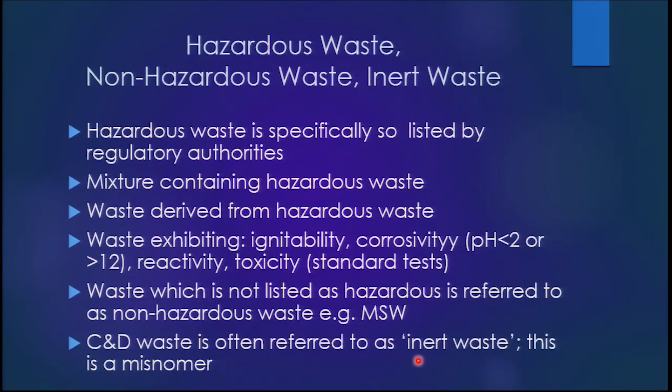Construction and demolition waste is often referred to as inert waste. Now, inert waste, in its purest definition, should not be chemically active, should not be biologically active, and should not be physically active. Those are the three things you need to have to become an inert waste. Again, I say, not chemically active, not biologically active, and not physically active.

Now, construction and demolition waste is all that we are breaking down, right? And if we are breaking down a building, then it's concrete, it's brick, but it is also wires, it's also the paint, it's all the rebars, the reinforcement bars. So untreated C&D waste or unprocessed construction and demolition waste is definitely not inert, right?

Then the next step is you can process the waste. You can do magnetic separation to remove the metals. You can do other kinds of separations to remove some of the other constituents. Then you get what is called processed construction and demolition waste. It's difficult to remove paint from it, and paint itself has some properties which are bothersome. So still it is not inert waste.

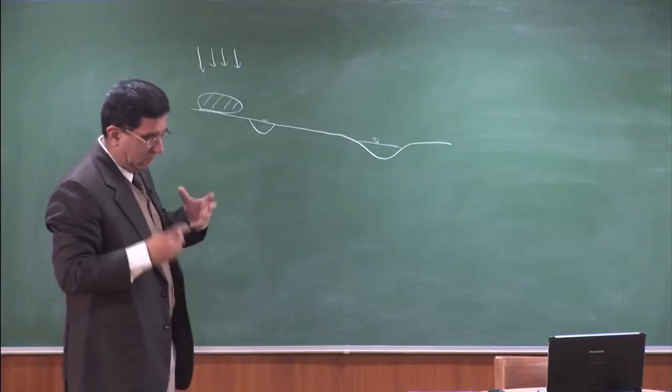So if the waste was not there, where is the rainwater going? It's becoming surface runoff, and partly it is recharging the groundwater. So when rain falls on the ground, does the bulk of it recharge the groundwater, or is the bulk of it surface runoff? A bulk of the rain doesn't go into the ground, because the ground normally has grass or a natural slope. So infiltration is low. Most of it is surface runoff. It goes to a local drain, the drain goes to a river, the river goes to the ocean. And therefore, the water goes like this, and maybe some of it goes like this.

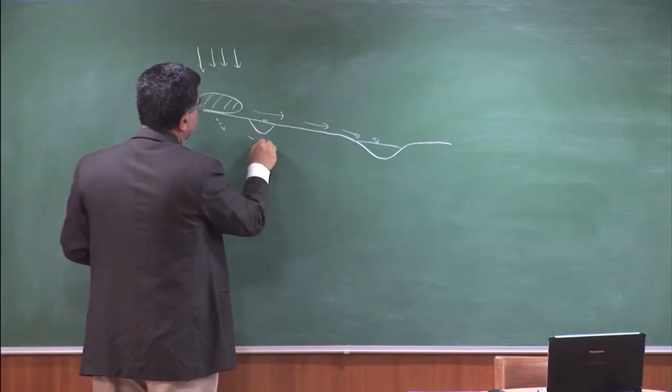And what happens? This goes to the ocean. Then what happens? It evaporates. It becomes clouds. It comes back and rains again. So really, the hydrological cycle is

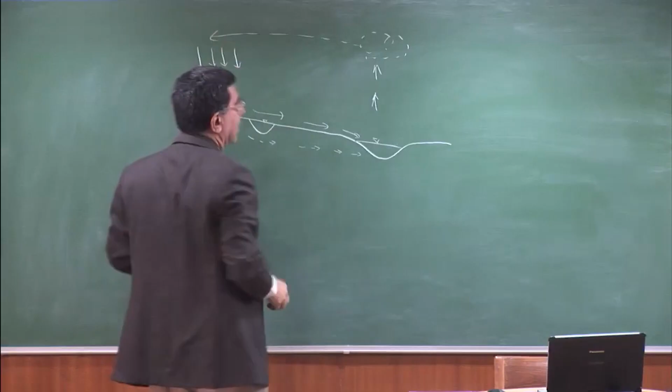so every now and then we have monsoons. Where are the monsoons coming from? The moisture-laden clouds. Where is the moisture coming from? Some place where the water evaporated, and when that cloud comes to a cold region, it falls as rainfall. So this cycle is going on every year, and our waste has knowingly or unknowingly become a part of this cycle. It chalta rahega.

Right? So we are looking at waste-soil interaction. And the first important thing to realize is when we place something in the open, we are making it a part of the hydrological cycle. If I had placed the waste in a shed which had a proper roof and walls and was closed all around, then what would happen? Then the waste would not become a part of the hydrological cycle, because the rain would fall on the roof, would put the rainwater aside, and we would prevent this waste from becoming a part of the hydrological cycle.

But till the time that happens, we are looking at this phenomenon. We are looking at the phenomenon of some waste being on the ground, rain falling on it, rain percolating through it, and going into the groundwater. So I've used some terminologies which you might be aware of: vadose zone, saturated zone, capillary rise, but we'll take a quick recap on this.

What we want to know is, in waste-soil interaction, what is happening when the water passes through the waste? And what is happening when it passes through the vadose zone? And what is happening when it is into the saturated zone? That's what we want to really know. So just let's quickly go back to those definitions. Saturated soil is all voids filled with water. Below the groundwater table is saturated soil.

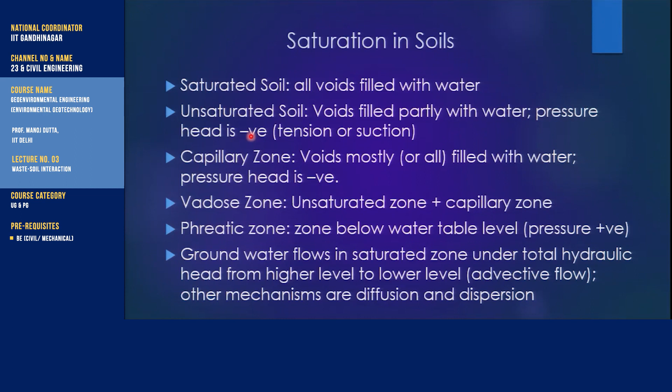Above the groundwater table, saturated or unsaturated? Partially saturated or unsaturated, but unsaturated soil, voids filled partly with water. And the pressure head inside is negative because of surface tension effects, so you have a suction or a negative pressure in the partially saturated soil. But there is a capillary zone above the groundwater. Is that saturated?

Yeah, the capillary zone is saturated, but the pressure inside the capillary zone is negative because the capillary action is making the capillary rise. So the vadose zone, the word vadose zone which we have used, it covers both the unsaturated soil and the capillary rise and the capillary zone. Truly, the saturated zone is below the water table. So phreatic zone is the zone beneath the water table.

Now we start to get positive pore water pressure, and groundwater flows in the saturated zone under total hydraulic head from higher level to lower level. This is called advective flow. We've all done this. The Darcy's law is valid. Q is equal to KIA. That is the mechanism by which the water is flowing in the saturated zone. We have not done how the water flows in the unsaturated zone. I will briefly visit that here.

The other mechanisms, once the groundwater is contaminated with something, that means the concentration of a particular constituent in the leachate is higher than in the groundwater. So there's a concentration gradient. So over and above the advective flow, you have the other mechanisms which are diffusion and dispersion. We'll discuss them very briefly later.

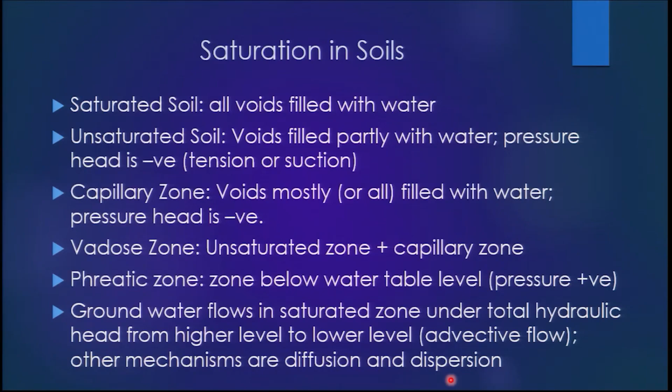This is not a course on groundwater contaminant transport. These are processes. There are huge softwares which can simulate diffusion and dispersion. Ours is a course on design of waste containment facilities, design of slurry ponds, and remediating contaminated sites. So let's look at the process.

The rainwater falls on the waste, some runs off, some infiltrates. So how much will run off and how much will infiltrate will depend on how the waste has been placed. If the waste is properly compacted, it has a convex upward shape, it has got a layer of soil on it, then most of the water which will fall will run off on the convex shape.

However, if it is a waste dump which nobody is managing and the surface is like that, undulating surface, then the water tends to stick on that undulating surface. It will form small puddles, and that water tends to go down more. So rainwater falls on the waste, some runs off, some infiltrates.

This infiltrating water, will it reach the ground? My question is, some water enters the waste. Will it reach the ground? So let me go back to the slide and let's try and simulate this on the board.

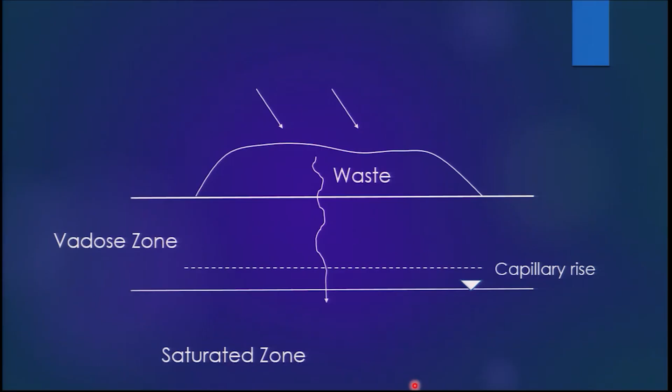As I said, some will run off and some will infiltrate. So if 10 units of rain fell, and let us say 7 units ran off, that means a good convex shaped thing, then 3 units went in. And now will the 3 units reach the ground surface? That's the first question.

Pardon? No, there's no lining. This is just a waste dump which seems to have a convex shape. If it doesn't have a convex shape, 3 will run off, 7 will come in. Right? The question I'm asking is, if 7 units were here, will there be 7 units here? Because where will they vanish?

Decomposition of what? Of H2O? Chemical reaction inside. Well, let it chemically react. So what? Some material will go into solution and still come down. So first, let's assume that the waste is not reactive. Then will all the water which fell on top come down? Maybe it will fill up the void, some part of it. So it will fill up the void, then it will come down.

So what you're trying to articulate is that if the waste is inert and X units went in, some may be held by the pore space. I'm not sure whether it will be held or not. But if you have fine pores, then by capillary action alone you will hold water. Only excess water will come down. So if X units come in here, something less or more than X can come. How will it be more? Maybe the waste itself is also squeezing out liquid.

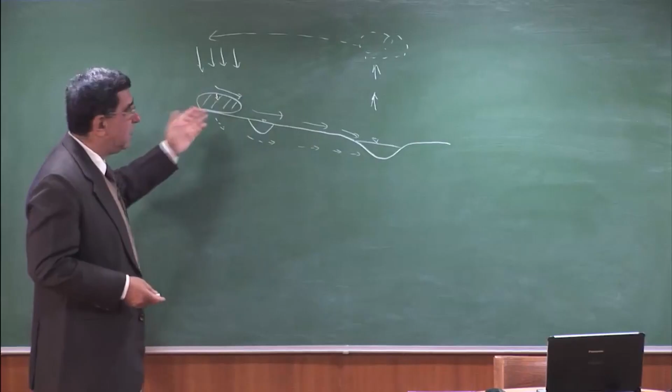But if leachate is going to be held in the pores, you may have less water reaching the base than the water which was coming in from the top. Then what happens? Now our leachate encounters the soil. Now in the soil also there is a distinctly saturated zone and the unsaturated zone. So when the leachate goes into the soil, what will happen?

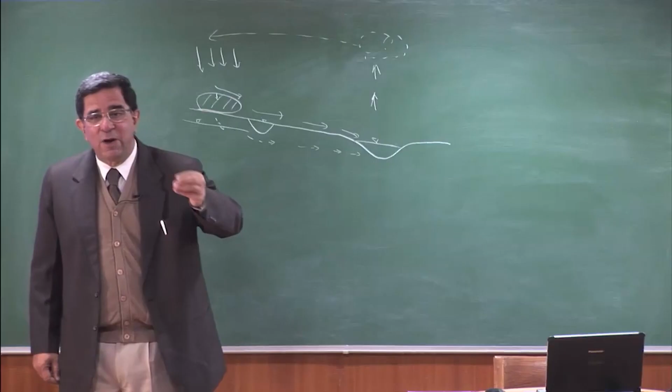Again some of it will be held, because in the unsaturated zone, maybe there is dry soil, so you add 1-2% of water, it is not going to flow, it is going to be held because there is a field capacity of the soil. Then the excess water will come down. The other thing is, will there be a chemical reaction now between the soil and the leachate which is coming in? What do you think?

Maybe? Yeah. So intense interaction between the water and the waste, and it can be two-way. It may be dissolving something and going down and precipitating it at a lower level. We can't predict the complexities of this, but we can model them. Then you hit the soil, and is soil inert? Why not? Is sand inert? Well, let's not talk about physically inert, but is it chemically and biologically inert?

Soil? Sand? So you said soil may not be inert, but sand may be inert. Is that a correct statement? Why will soil not be inert? It's a mixture of? What is typical organic content of soil? So what was said was soil is not inert because it is a mixture of organic and inorganic.

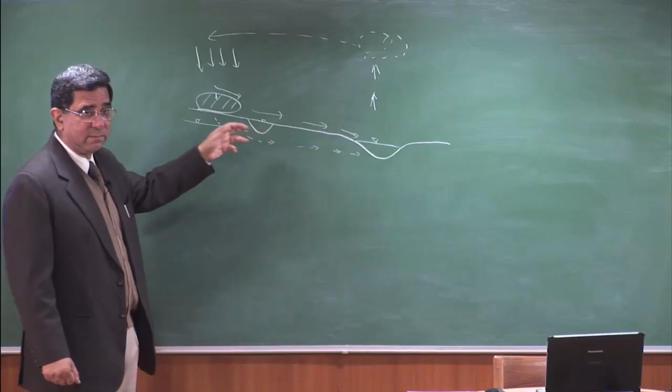And the balance leachate, which is over and above the holding capacity of the soil, goes into the groundwater. And that interaction continues because there is a soil matrix in the groundwater also. But now the groundwater is moving. In this moisture, nothing is moving. But when you come to the groundwater, it is moving under a hydraulic head from higher ground to lower ground. So consequently, the contaminant begins to move in the groundwater. So that is the process. At every stage there is interaction and all kinds of interaction. So for a civil engineer, it is mind-boggling, but it's not very simple.

It's too complex. So what is the worst design condition? Worst design condition is leachate is coming out of the waste, going into the soil, the soil is becoming saturated, and then it is getting a saturated connection with the groundwater. That's the worst condition, because is the permeability of partially saturated or unsaturated soil more than that of saturated soil or less? Why less? The void space is the same.

Yeah, so one is the issue of matric suction, and second, water will only travel through the water film. So if you have a void space in which 50% of it is water, then water will only travel through that water film, and therefore the cross-sectional area of the pathway is smaller. So partially saturated soil will have low permeability to water. As saturation increases, permeability to water will increase, and when it is saturated, it will be the highest value. So the critical design condition is everything is saturated.

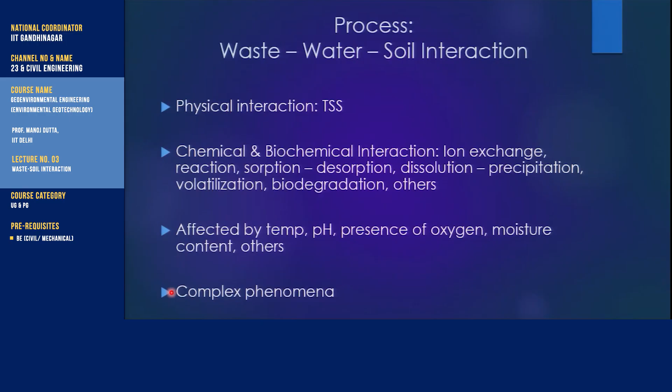So what kind of interaction occurs? There is physical interaction. As the rainwater goes down in a waste dump, total suspended solids may go down. The fines may travel with the water as it goes down. So there is a tendency, if you have heterogeneous municipal solid waste, the fines tend to come down with time, because as the water goes through, the fines come down with it.

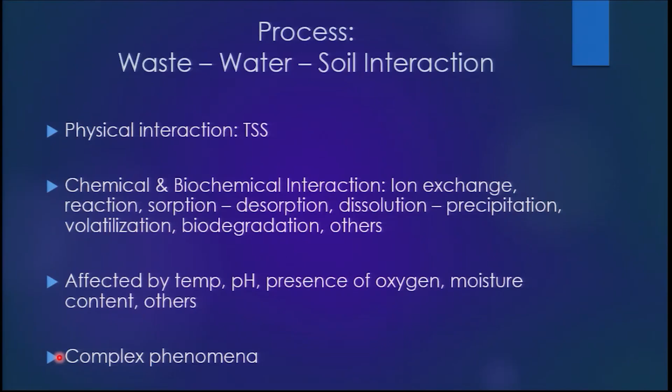And there are a lot of chemical and biological interactions: ion exchange, reaction, sorption, desorption, dissolution, precipitation, volatilization, biodegradation, and others. I can't predict which is the predominant reaction which is going to take place. And these are affected by the temperature, the pH, the presence or lack of oxygen, the moisture content in situ, and other factors. So this whole thing is like a biochemical factory which is going on. Waste first interacts with the water, then interacts with the soil, and then it reaches the groundwater.

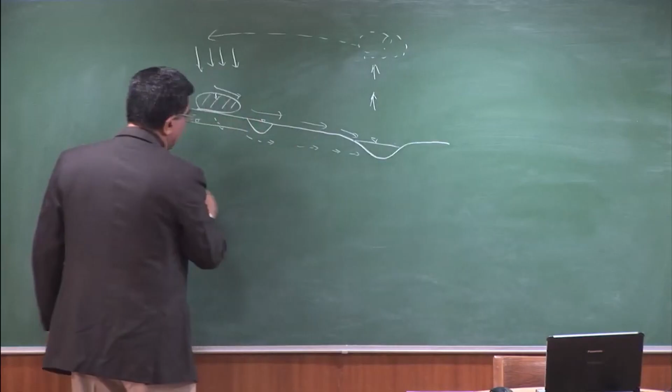Again, one may tend to think, let us say I have soil. Okay, let's go to original ground. And 100 units of rain are falling on this original ground. And let us say out of these 100 units, 50 to 60 units are running off, surface runoff. Then what is going down? 40 to 50.

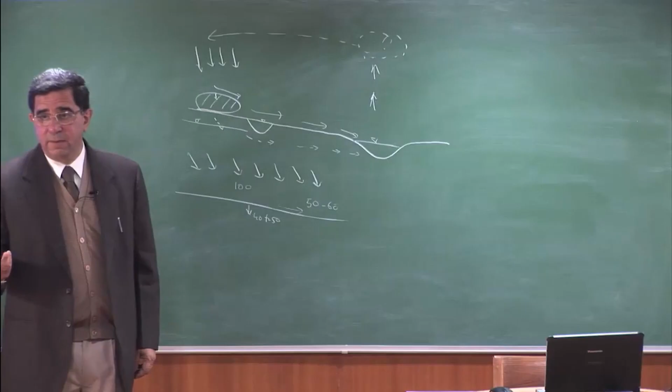Now some of it will be held, right? Because the soil on the ground surface is dry. The water table is somewhere deep below, or few meters below. So out of this 40 to 50, due to evapotranspiration, 20 to 30 may go up. So what is going down? Maybe even 10. Now these are all hypothetical figures.

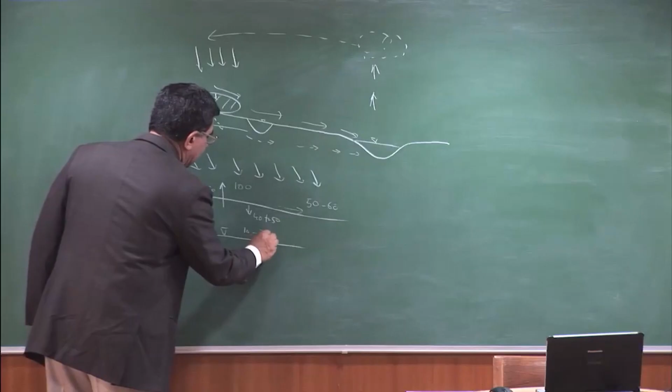But if you look at India as a whole and take the major river basins, the following is what is observed. About 50 to 60% of all the rain becomes stream flow. Groundwater recharge is only 10% or less. So groundwater recharge from directly precipitating rain is not very high. And the balance is evaporation and evapotranspiration. First, what accumulates on the surface is evaporated, and then the plant roots also take it out. So very little amount reaches.

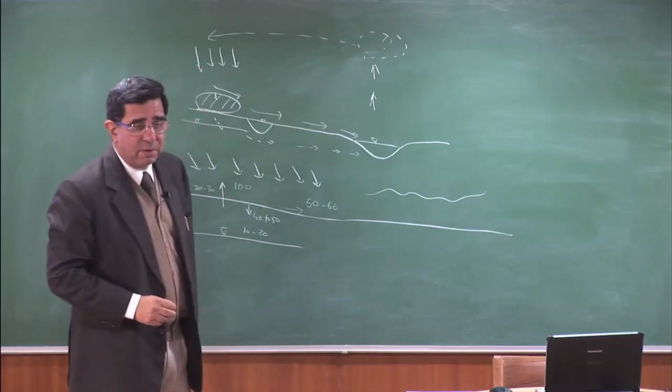But if I now put a badly maintained waste dump in position, what is happening? The 50 to 60 runoff falls to 10 to 20 or 20 to 30, right? 80 goes in. Now in a waste dump there is no grass or vegetation growing. It's a municipal solid waste dump, or a hazardous waste dump. So is there transpiration? No. Is there evaporation? Yes. If some of the water holds on the top, it will evaporate back. So maybe 10 will go back. 70 is still going through.

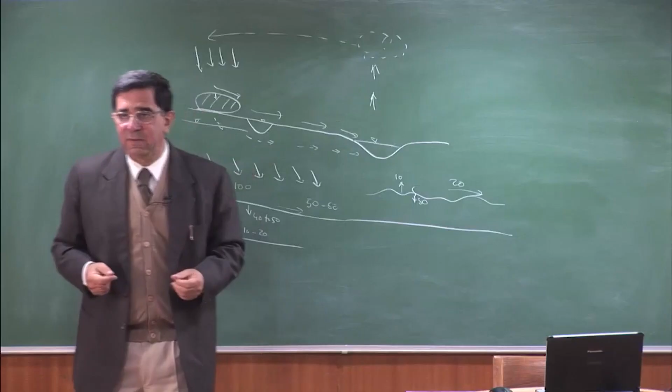Now the model comes into play. Out of the 70, maybe 30 should be held by the waste. Maybe. But what if the waste has vertical preferential flow channels? If you go to a waste dump, you'll sometimes see vertical cracks. Through those, it will go very fast. So this concept of a homogeneous soil mass doesn't exist for waste. Waste is a heterogeneous mass. If it went uniformly everywhere, maybe 30 to 40 would be held back. But it doesn't; you may have vertical paths, horizontal paths, any kind of high permeability zones.

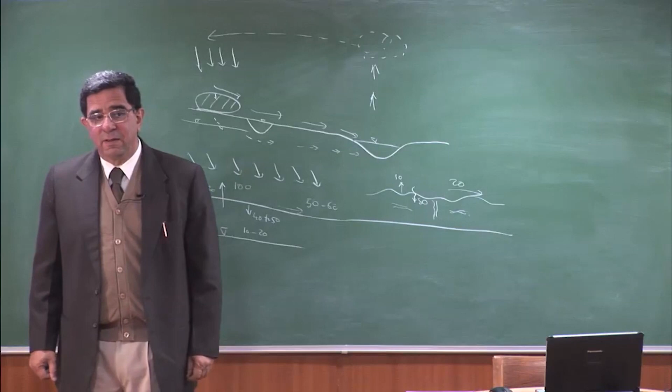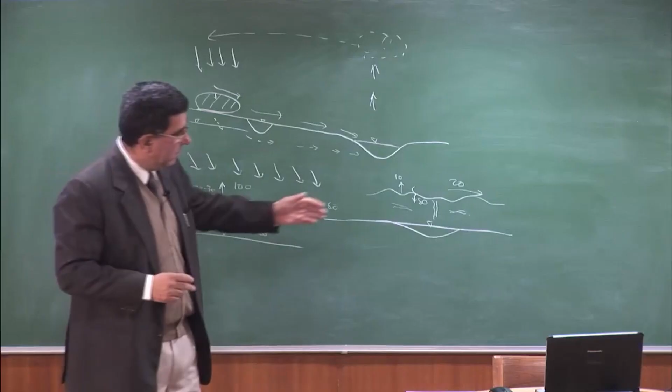And then it comes and sits at the ground surface, and the ground surface is horizontal. Waste is typically placed where? In horizontal ground or low-lying areas? I told you, most of the time waste is put to start with in a low-lying area. So all of it will come and accumulate in that low-lying area, and the fines have come down anyways. And will this go back up? No. There's no evaporation possible, it's all covered. So a larger amount of leachate tends to come down.

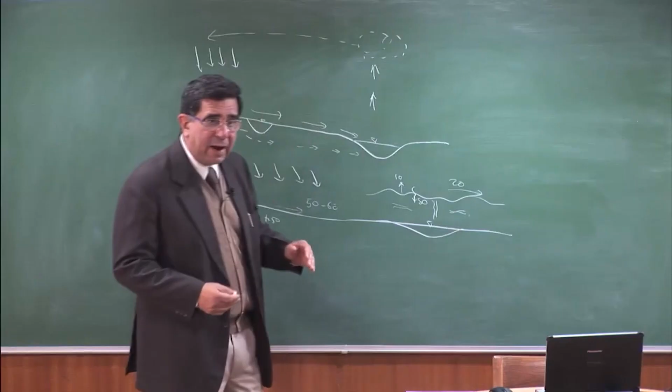However, if you do leachate calculations using the holding capacity of soil or an equivalent soil mass, you tend to show a lot of water is held in the waste, which may or may not be held, depending on the vertical preferential flow paths. And if you go to a waste dump, you'll find perched water tables. Why? Fines came down and settled at one level, and at another level. So there may be high permeability zones and impervious zones as well. When excavating, though there is no water table, you find little puddles of water inside the waste because of the fines. They don't reach the base. When you have a 30-meter high dump, fines will come down.

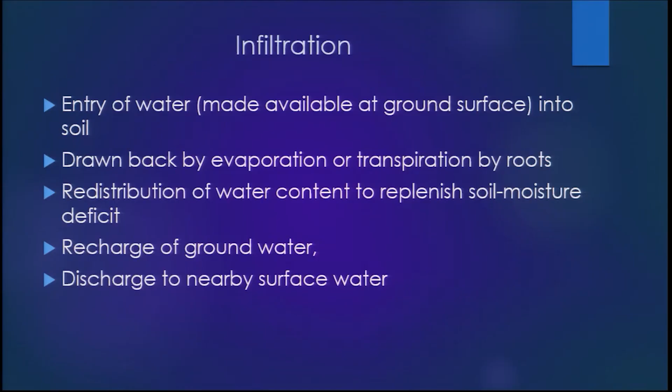Anyways, infiltration capacity is the maximum infiltration rate. Field capacity, as I told you, moisture content of unsaturated soil above which rapid downward movement of water takes place, and soil moisture deficit, moisture content below field capacity. A soil with deficit holds infiltrating water.

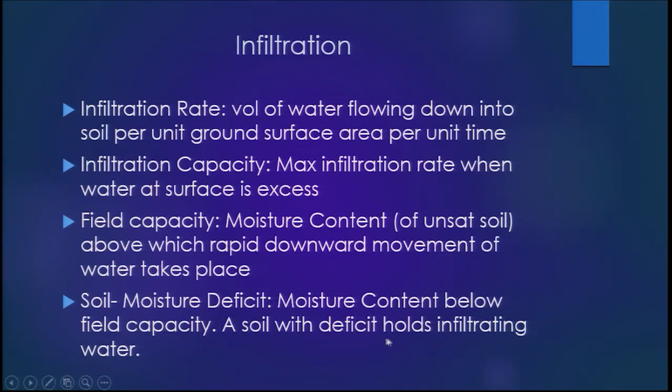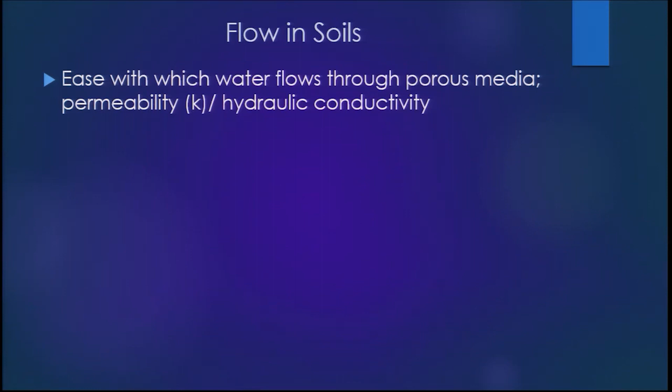We all know about flow in soils, Darcy's law, advective flow, but let's recapitulate. The ease with which water flows through the porous media is reflected by the term permeability. You will also find the term hydraulic conductivity written in many books. So flow in saturated media is through difference in total head. Flow in unsaturated soil will not occur unless suction greater than the tension is applied. If the water is in tension, you have to have a head greater than that.

So typically in dry soils, the tension is the main dominating factor. As saturation increases, tension decreases, and at saturation gravity flow occurs. K of the unsaturated, we already said permeability of the unsaturated is less than the permeability of the saturated. Water movement is only through the liquid phase, that is within the water film around the particles. As saturation increases, volume of water film increases, hence hydraulic conductivity or permeability goes up.

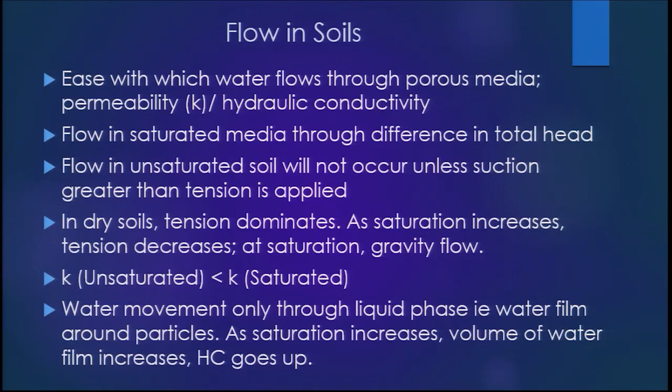The main mechanism is advective flow. That means the plume is moving because it's a gravity flow, and there's a difference in the total head causing flow from one point to another. The other factors are diffusive flow, which is due to difference in concentration, which we look at when we are doing contaminated sites, and dispersive flow, due to variations in pore size and hence variations in seepage velocity.

You send water along a channel and suddenly the pore sizes change. So there will be dispersion in the flow because there is a kind of tortuosity. The seepage velocity in the fine pore will increase. So it's not the same thing as everything traveling along one line, and that is the dispersive flow. In coarse-grained soils, advection predominates. It's more than diffusion by many orders of magnitude. So diffusive flow and dispersive flow are not of any consequence.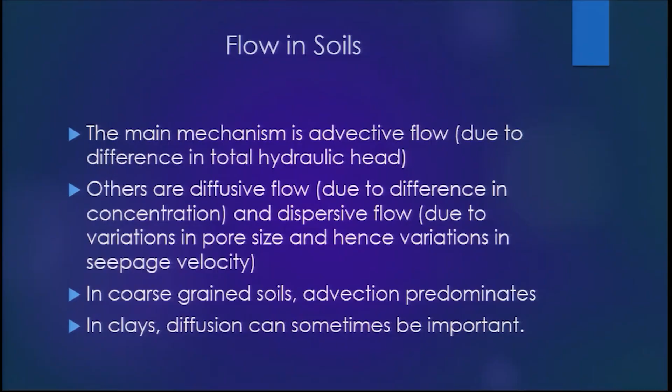It may be 100 to 1,000 to 10,000 times larger. Advective flow, that means flow under gravity. Why? Because the coefficient of permeability is very high. In clays with low permeability, sometimes diffusion can also become significant. So by and large in soils, diffusion is very small. But in clays, diffusion can be of the same order of magnitude, and this can become important when we see performance of liners.

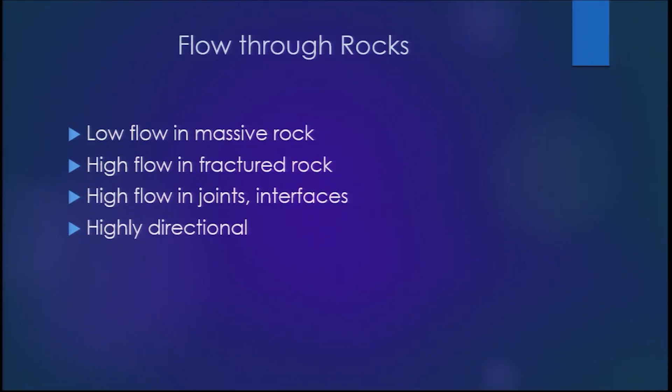Flow in rocks is different from flow in soils. Soils are typically treated as homogeneous, isotropic, though horizontal permeability in soils is usually larger than the vertical permeability because of the depositional effect. So alluvial soils will deposit in layers, and there will be some anisotropy, and horizontal permeability of alluvial soils may be more than the vertical permeability.

But in rock, it's all about fissures and joints and fractures. So mostly, if you have solid rock, flow is not going to take place. But if you have fissures and joints, flow will take place. And it is highly determined by the direction of the fissures and the joints.

And even in the unsaturated zone, you may have flow occurring along these fissures and joints in a particular direction. The surrounding environment may be all unsaturated, but the water may travel through connecting fissures and joints. So it could be vertically downwards, it could be horizontal, it could be inclined. So it's highly directional. And that's the difference, that in soils you have a granular media which is porous but which is by and large uniform. In rocks you will have...

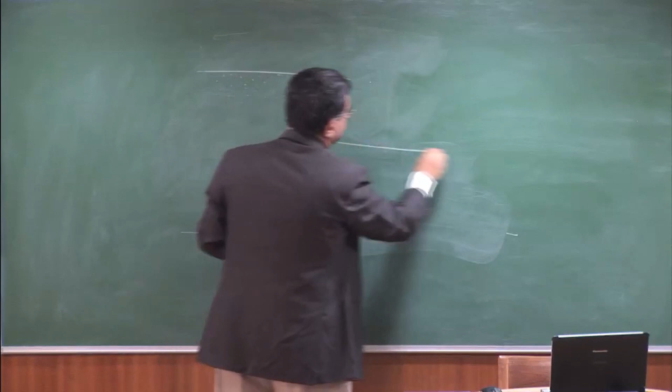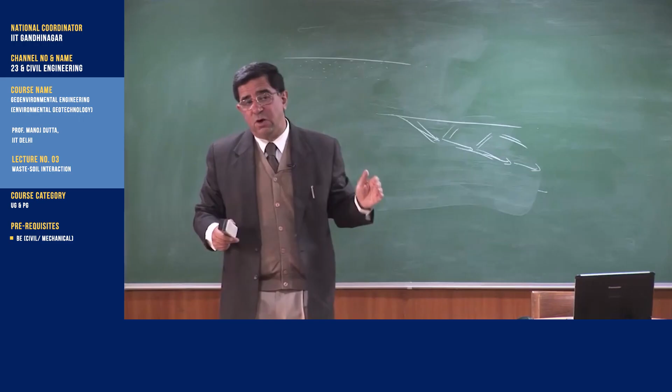So you can have preferential flow paths in these joints and fissures. So you may have flow taking place very fast. And many of the contaminated sites are because the waste was dumped on exposed fractured rocks. When you have rock, typically the ground surface will be more inclined. That means the gradient is higher, and water will travel during the rains through these fissures, and if the contaminant has entered, it will travel very fast and reach a well in a particular direction. So rocks are all governed by the fractures and fissures.

Let's look at flow regimes. Let me see if I can use the projector. So I'm just going to introduce you to the concept of recharge and discharge.

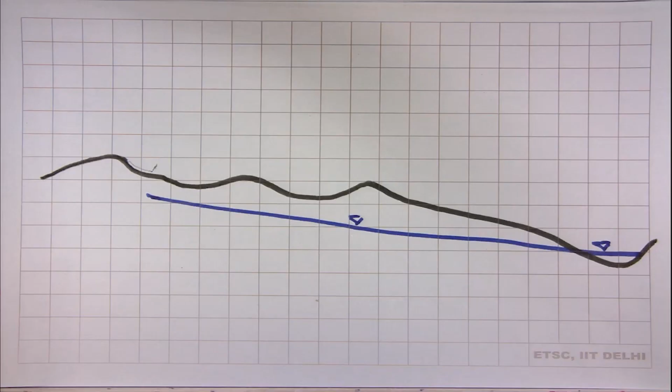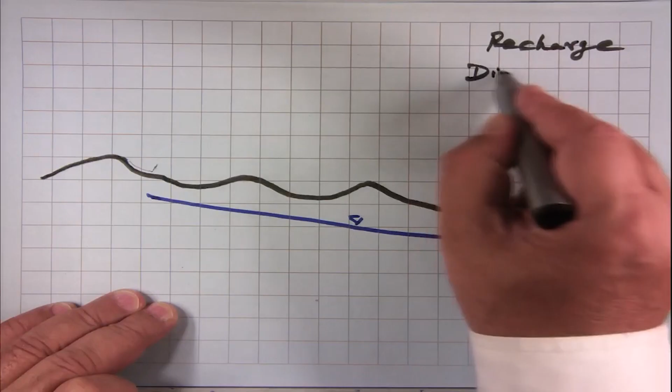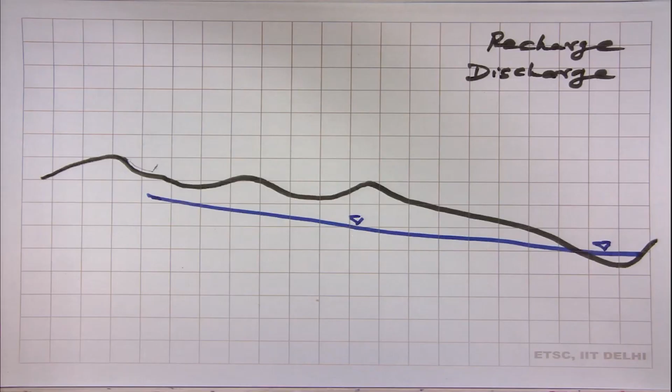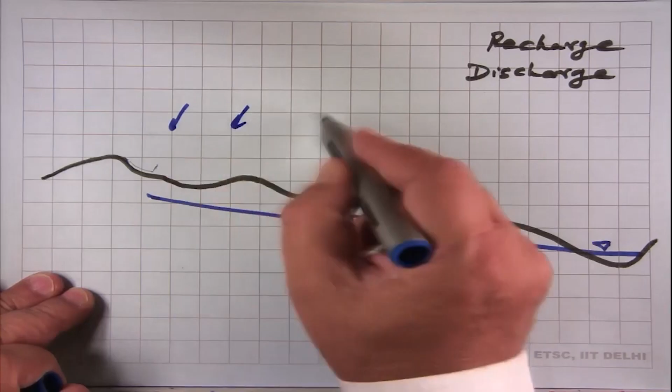So if this is the topography of an area, water is reaching a stream or a river or a rivulet, and that's the ground surface topography. So what happens when rain occurs? This is high ground, this is low ground. So this is the watershed. On both sides the water is coming in. So if I have rain here, what will happen? It's simple for me to say that whatever rain falls here, it's going to go down. A little bit may come here. Okay?

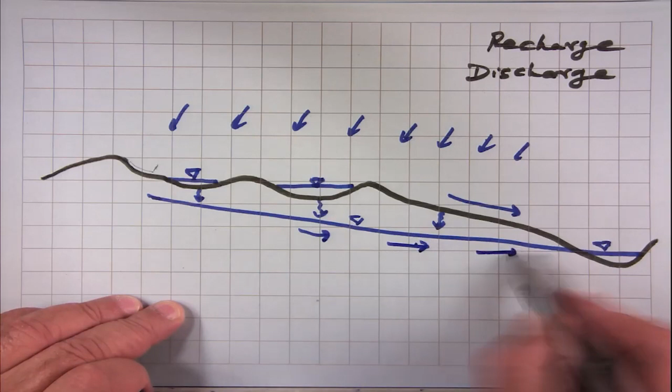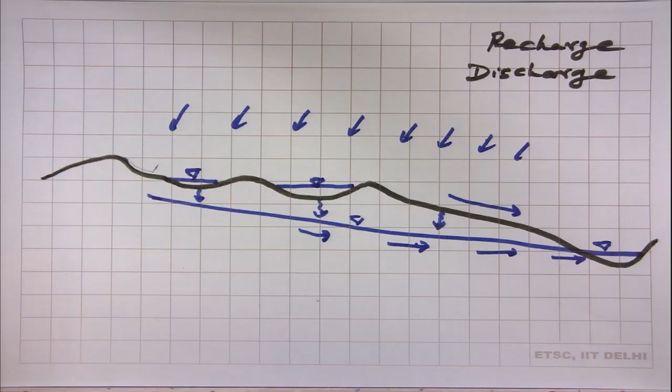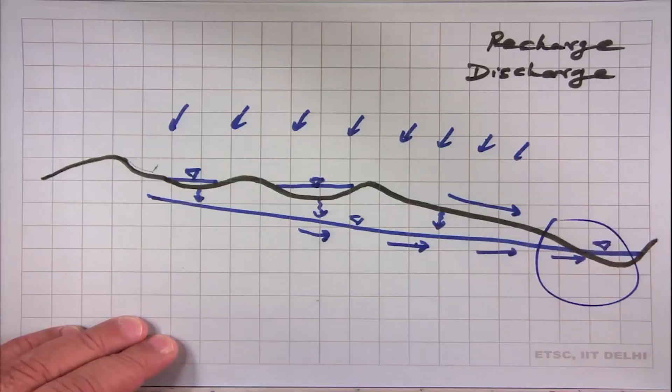But what happens here? You might have a small puddle or a pond, or you may have a minor rivulet. So this will then work to recharge. Okay? And finally, all this water will go and discharge into the river. So any ground will have recharge zones and discharge zones, and bulk of the area is recharge. Small amount is discharge. See, this is the discharge area for groundwater, and this is the recharge area for the groundwater.

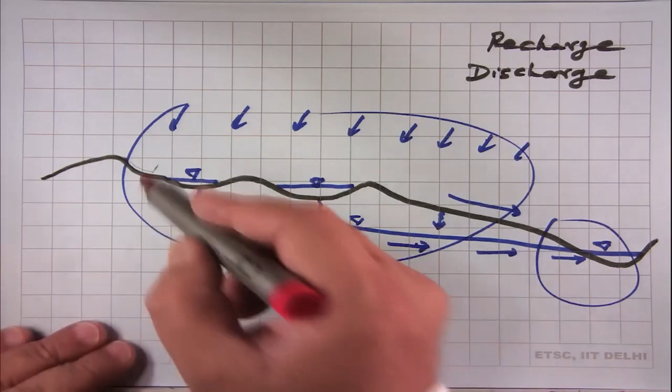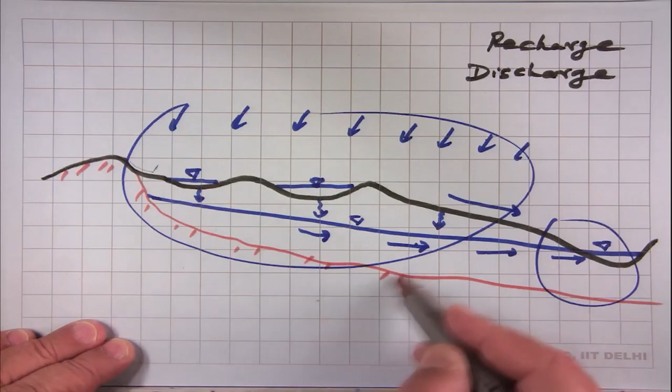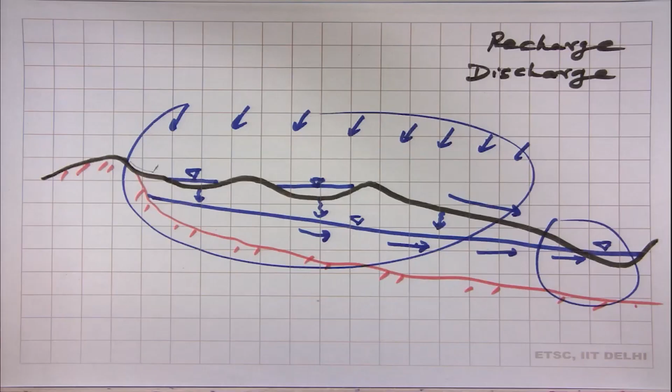If I was to attempt to make a rock line, I just gave you a ground surface. So maybe the rock is different ways, but one of the options is maybe the rock is like that. So all this may be a deposited material. So you have rock, you have groundwater, and all this is recharging the groundwater. And so depending on where you put your waste now, you can have a problem of the appropriate nature. For example, if you put your waste in this low-lying area, you have created a real problem. Why? Because this is a low-lying area and it is recharging the groundwater at that location.

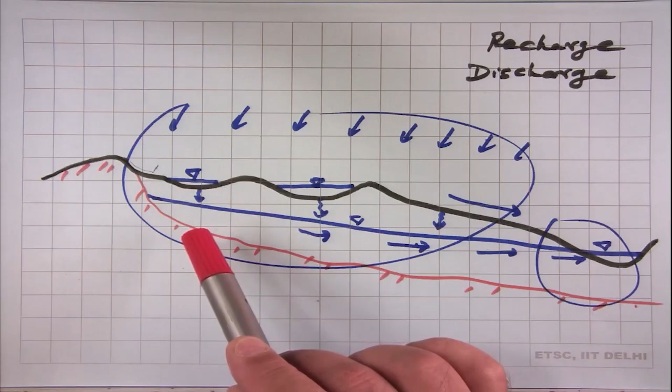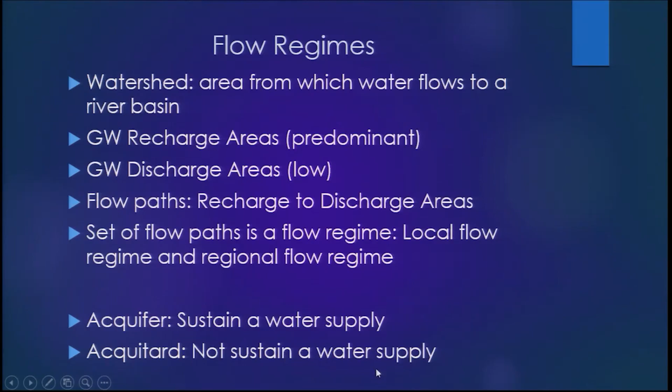Quickly, as we have already discussed this, soil has the ability to interact geochemically with the constituents of leachate and groundwater. Interaction can cause immobilization or retardation of these constituents, and this is referred to as geochemical attenuation of the soil.

Attenuation capacity is not infinite, it is limited. Please understand this. There is an initial attenuation capacity which is high, right? But what will happen? After some time, whatever had to deposit would have deposited, and the attenuation capacity will go down. So initial attenuation capacity looks very attractive, that soils can withhold contaminants from reaching the groundwater. But if leachate is coming in year after year after year, there is not going to be infinite capacity. So in the long term, the attenuation capacity depletes.

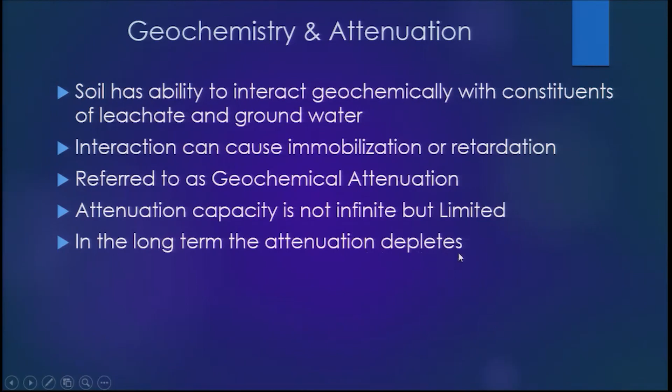All constituents are not attenuated. Don't think every contaminant will get attenuated. For example, a chloride ion is Cl- and a calcium ion is Ca2+. What will happen? Ca2+ can be retarded by clay because it might get attached to the net negative charge on the clay. But what will happen to chloride? Cl- is not going to be retarded. So many things will get retarded, many will not. If you look at literature, there are many examples of chromium, arsenic, cyanide, selenium being retarded in many soils, but not infinitely. They retard for some time and then a breakthrough occurs and it goes forward.

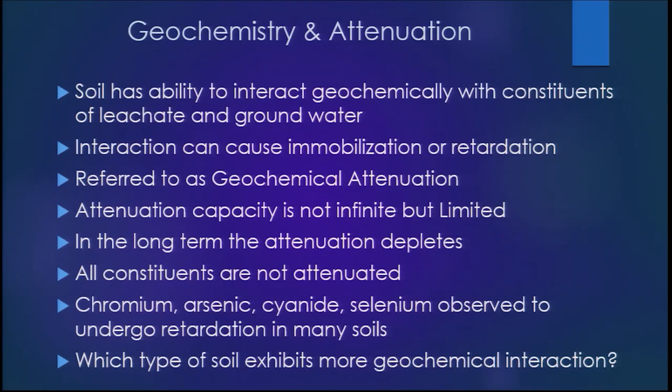So which type of soil exhibits more geochemical interaction? Yeah, between coarse-grained soils and fine-grained soils, fine-grained soils are more geochemically interactive because of the net negative charges on the surfaces, also because of the finer pore size and more intimate contact of the surface area with the leachate.

Can we measure attenuation? Well, you can do some laboratory tests. First, of course, you can determine the mineralogical and geochemical properties of the soil. If you have larger clay content, you can say it will have larger geochemical attenuation capacity. But the simplest test is take some leachate, put some soil in it, mix the two in some proportion, leave it for 24 or 48 hours, come back, take out the leachate and see whether any chemical has depleted. If the concentration has gone down, that constituent is being retarded.

In sequential batch testing, you do this more often. Means you take a leachate, you interact it with some soil, then take some fresh soil, interact the balance leachate with that, and in this way you can get a cumulative figure. So single batch testing will give you a kind of initial attenuation capacity, and sequential batch testing will give you a more cumulative attenuation capacity. You can read about these details in the chapter on geochemistry in Daniel's, the first book that we had talked about.

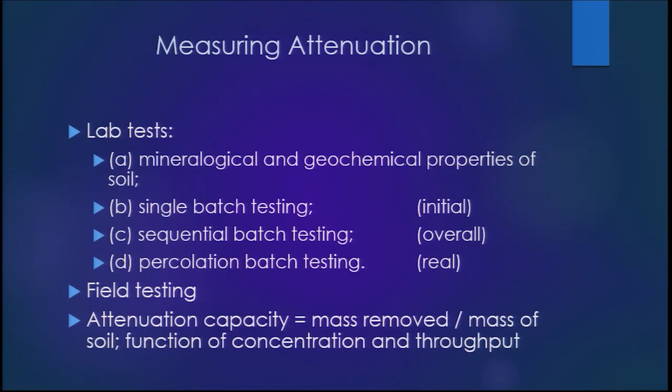So attenuation capacity is typically mass of the contaminant removed over the mass of the soil. And this is again a function of many things: the throughput, the time, the concentration, the temperature, the available oxygen, the pH. But you get a value, you get a hold on the value.

From design perspective, attenuation is overrated. I would like to design assuming the attenuation capacity is depleted. I cannot rely that the soil will attenuate, unless you can tell me, sir, no, I have got 30-40 meters thick soil which will attenuate the leachate and show that for the next 100 years it can attenuate all the contaminants which are going to go down. So typically, geotechnical design presumes attenuation capacity is depleted. We should not let anything go into the soil.

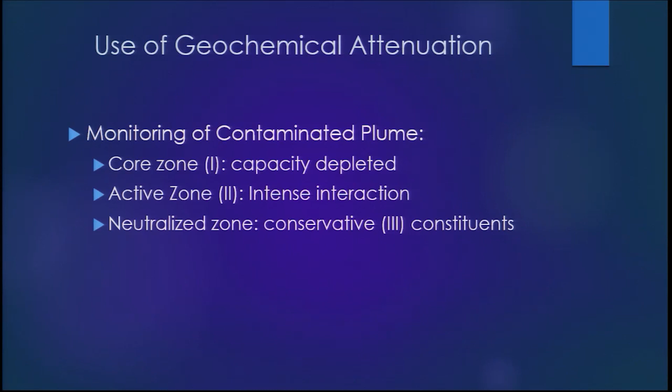Because of this attenuation, and everything doesn't get attenuated, as I told you, we find that in the plume there are 3 zones: a core zone, an active zone, and a neutralized zone. In the core zone, attenuation capacity is depleted. In the active zone, interaction is taking place. And in the neutralized zone, conservative constituents, means non-reactive constituents. I gave you the example of chlorides. So it may be a non-reactive constituent. So in the neutralized zone, the non-reactive constituent will go forward.

Just imagine a plume. What will be in the front of the plume? The reactive components or the non-reactive? If I have a plume which is traveling downstream along the groundwater flow, in the very front of the plume, what will you get? Reactive constituents or non-reactive? Non-reactive, because they have escaped all the reactions. The reactive components are coming only when the attenuation capacity will get depleted. So really, the non-reactive constituents travel the fastest.

And if you are trying to detect groundwater contamination, what is it that you should be looking for? Yeah, suppose you have 5 or 7 contaminants, you are trying to find out what is the spread of contamination. So you should actually be targeting the non-reactive contaminants. So that was the plume that we had seen, and those are the 3 zones.

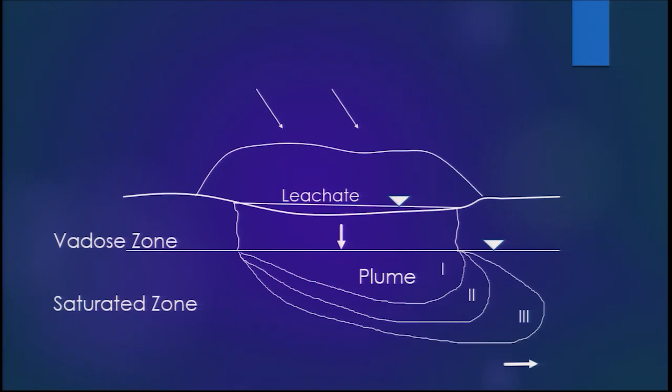That's the core zone. It's completely depleted. Attenuation capacity is completely depleted. Very little contaminants are held. Here, attenuation capacity is there. Reactions are taking place, right? And here, the reactive constituents have not reached. Only the neutralized conservative constituents have reached. So here you will find the non-reactive contaminants.

And as I said, if you are putting a tube well to detect, or if you are using other techniques, you are going to detect the non-reactive ones. So core, active, neutralized.

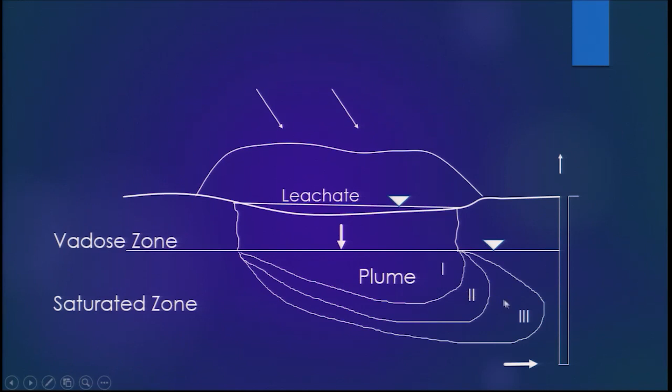So the critical design, I've already stated, this is just reinforcing. We assume accumulation of leachate at the base of the waste because it's a low-lying area. So there's a kind of a continuous supply of leachate, either from the squeezing fluid of the waste or from the rain water which has infiltrated. We assume that the vadose zone is saturated, and we assume that the attenuation capacity is depleted. And our solution must be a design which takes this into account.

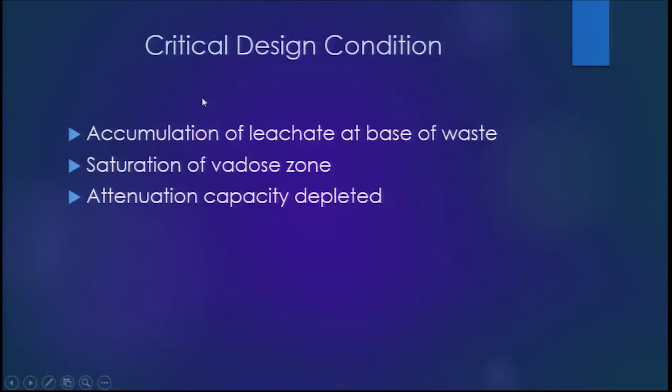Finally, we have still to discuss these 3 examples. So let us examine whether common salt, when it is stored on ground, should be treated as hazardous, non-hazardous, or inert. Common salt is not inert because it dissolves in water. So when rain will come, common salt will dissolve in water and tend to percolate in the ground. Common salt is not classified as a hazardous material because we eat it, and in low concentrations it is not

harmful to man. However, if common salt percolates into the ground and reaches the groundwater table, it can cause drinking water to become like salt water and not suitable for drinking purposes. Consequently, common salt for the purpose of subsurface contamination can be treated as being harmful to human health. And thus, depending on the system that we choose, we can either designate it as hazardous because excessive intake of common salt can cause high blood pressure in human beings, or

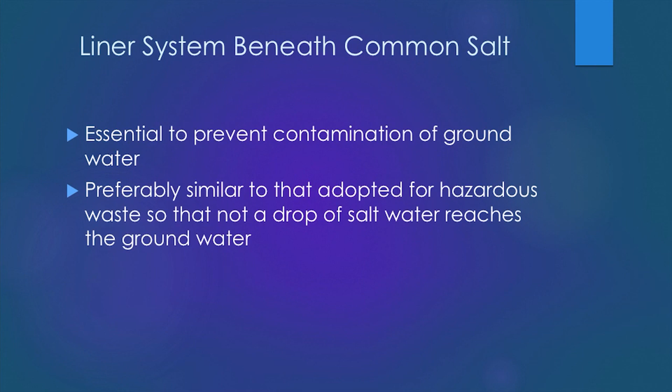Mining overburden, which is nothing but excavated soil and rock, appears to be material which is inert, and therefore one is tempted to classify it as inert waste. However, please do recall that excavated soil or rock is prone to erosion both by wind and by water. So during hot dry months you will have fugitive dust emissions from mining overburden, and during monsoons you will have erosion gullies being formed on the mining overburden and muddy water going into the rivers.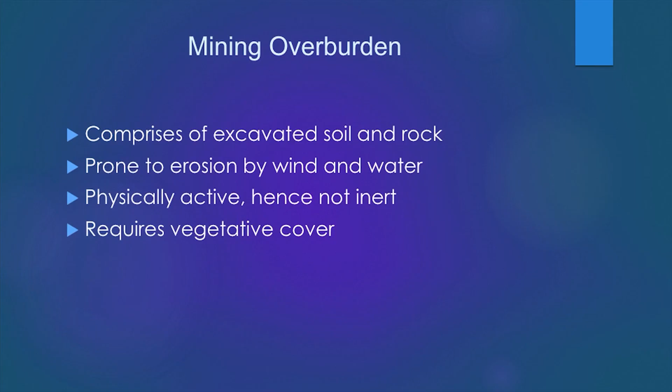So mining overburden is not inert. It is physically active and it impacts the environment in the form of fugitive dust or total suspended solids. So mining overburden too can be classified similar to municipal solid waste, that is a non-hazardous waste which will impact surface water and air quality around the waste.

Clean water in a pond. Well, clean water is drinking water, and if it percolates into the ground, it can reach the groundwater. However, since it is drinking water, it is not likely to alter groundwater quality. However, if a lot of clean water is stored in a pond in an area which did not have a pond in the past, the water may cause the groundwater table to rise. As the groundwater table rises, it can have two impacts.

One, the area or the land can become waterlogged, or two, salts from the lower strata of soil can come up to near the ground surface as the water table rises, and this can affect the vegetation or the crops which are growing at the ground surface. So once again, it is important to recognize that clean water may not affect quality, but it can change the ecosystem, because both waterlogging as well as upward movement of salts can affect the quality of vegetation and the quality of the crops which are growing on land adjacent to the pond.

And hence, one has to be careful that we should line the pond with an impermeable material so that the water does not go into the groundwater and cause a change in the groundwater regime.